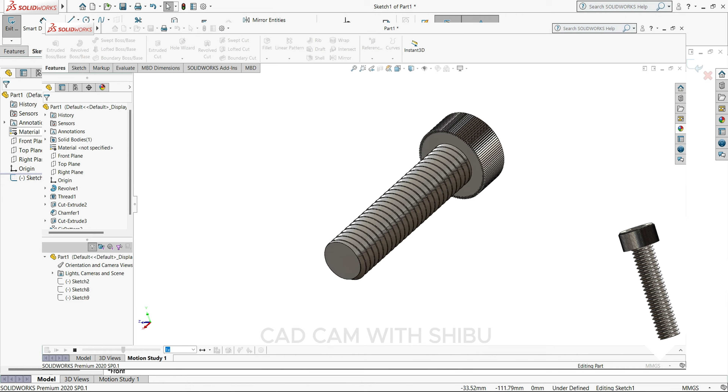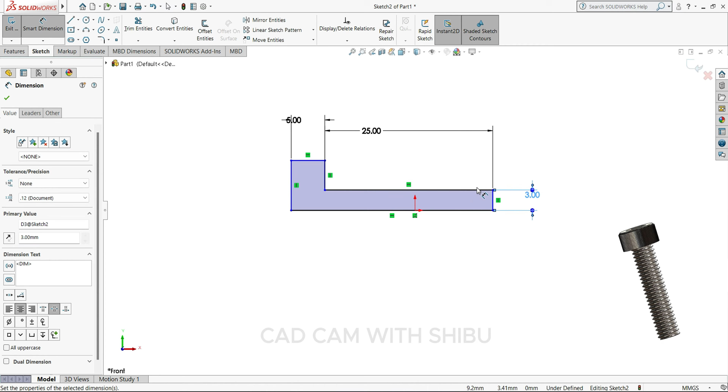So let's start. We'll start with the front plane. Select the line, draw the sketch here. Okay, make this line vertical. Then we'll give the dimensions: 25 mm, 5 mm, 3 mm, and 5 mm.

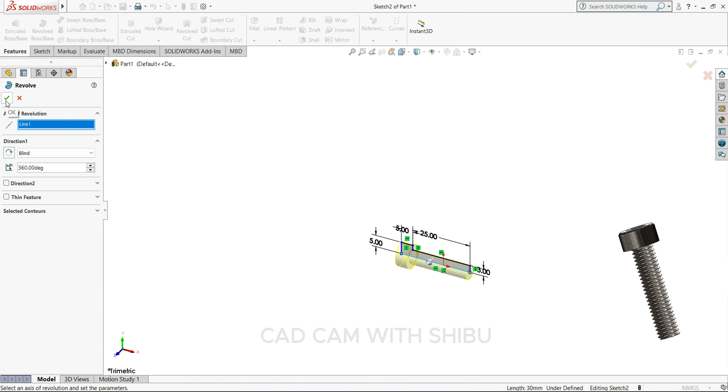Now go to feature, revolve boss base, select this line. Okay, you can see our bolt body is ready.

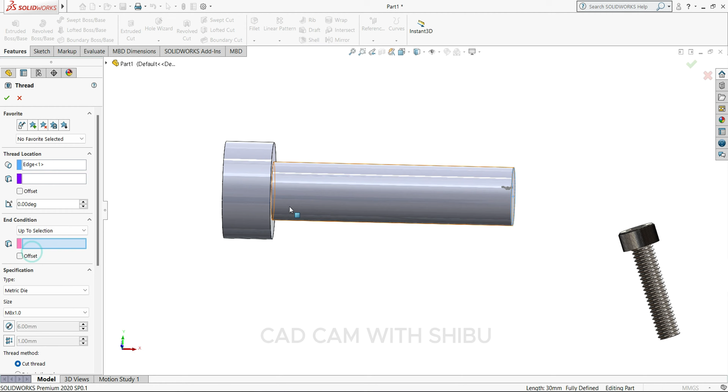Now we have to cut the thread. So for thread I will use the hole wizard thread. Select thread location, so we'll select this face here, up to selection, so we'll select this face. Thread will keep M6, and here will be metric die.

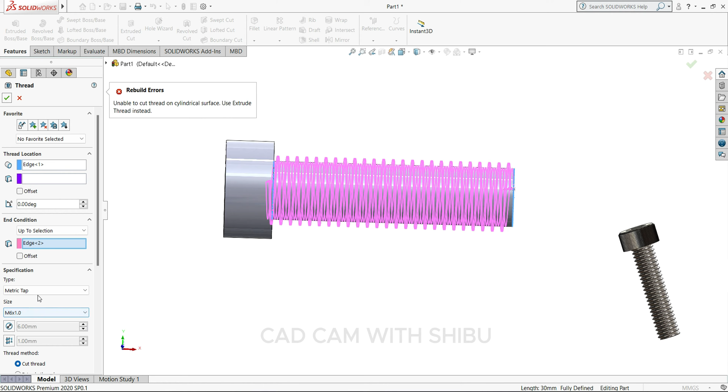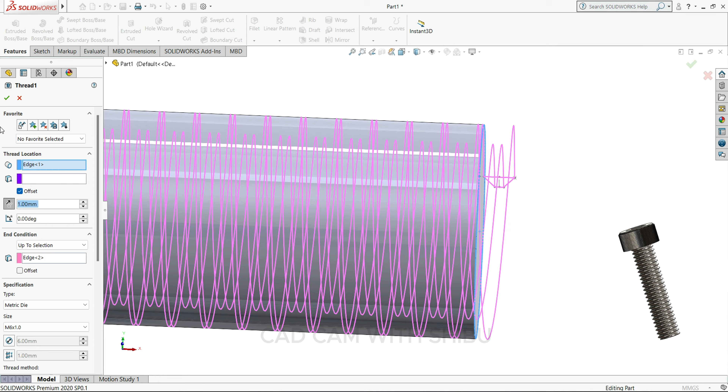Okay, now you can see our thread is ready, but here you can see this place. So for that, go to thread, edit feature, select offset here, reverse direction. Okay, now you can see. Now we have to select this face, normal.

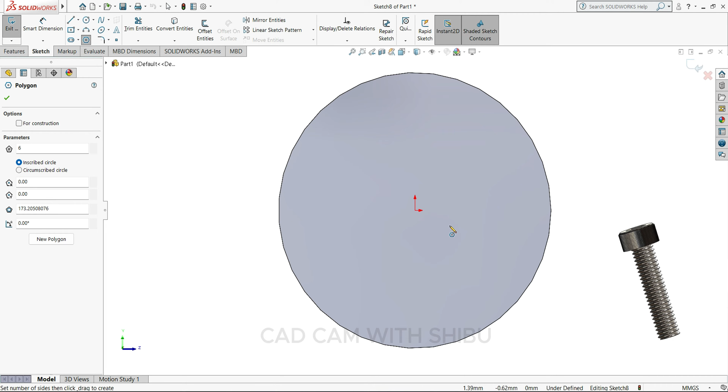This one will keep 5 mm. Okay, now go to feature, select extrude cut here, 4 mm.

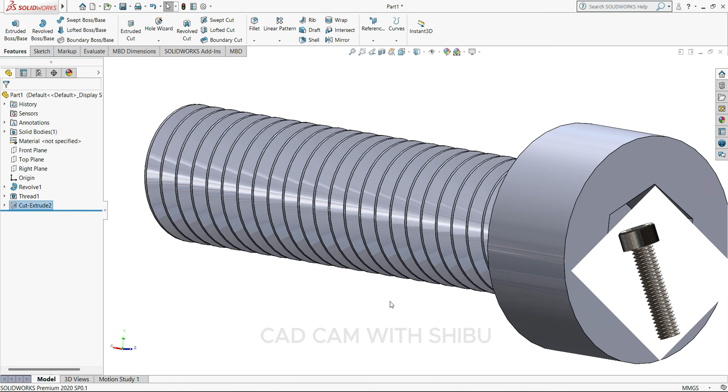Now select this face, we'll cut a chamfer here. So the chamfer 1 mm, or 0.5 - yeah, 0.5 is okay.

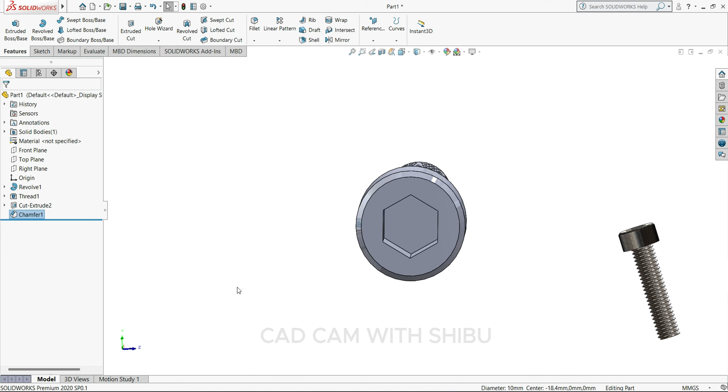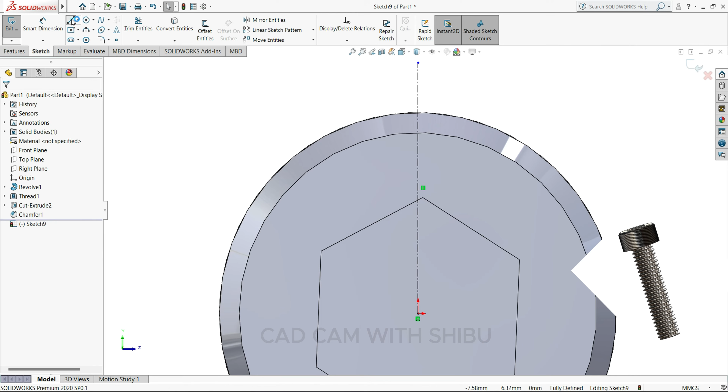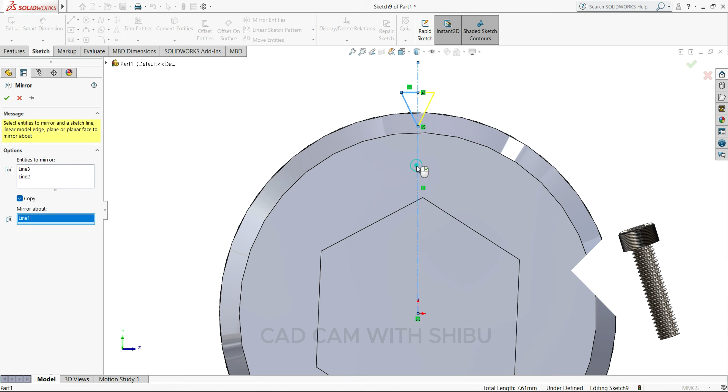Now we have to make knurling on this face, so select this here, normal. Draw the center line. Okay, now we will create one sketch here, so select the line. Okay, and then go to select a mirror, entities to mirror, so select this line, mirror about, select this center line. Okay, now our sketch is ready.

Let's keep some dimension: 0.50, and 4.60. Okay.

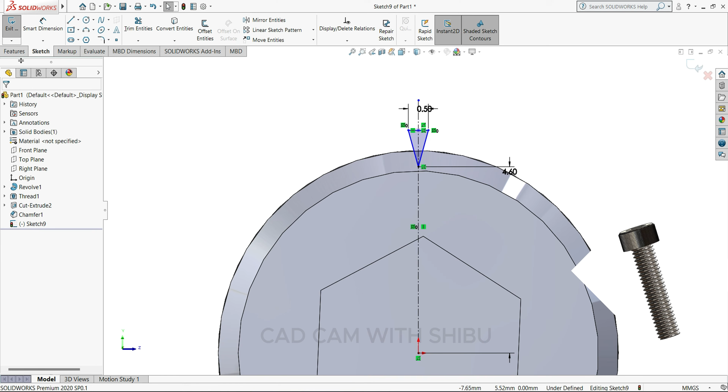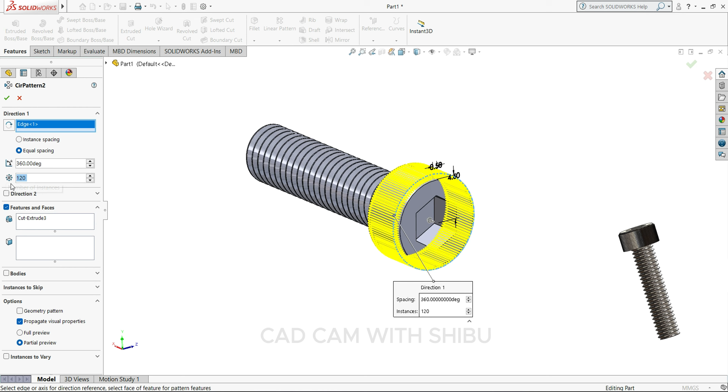Now go to feature, select extrude cut here, select through all. Okay, now select extrude cut here, select circular pattern, select this circle and keep here 120 instances, equal spacing. Okay, you can see.

Our bolt is ready. Let's define some material: metal, polished steel. Okay.

Now you can see our bolt is ready.